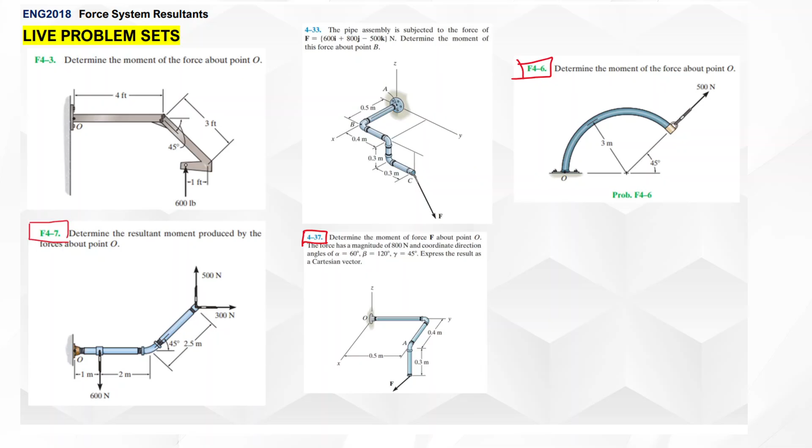We're not going to go for Cartesian vector notation anymore that much. So here we have some more 3D problems - we're going to go more on beams, the reactions, and...

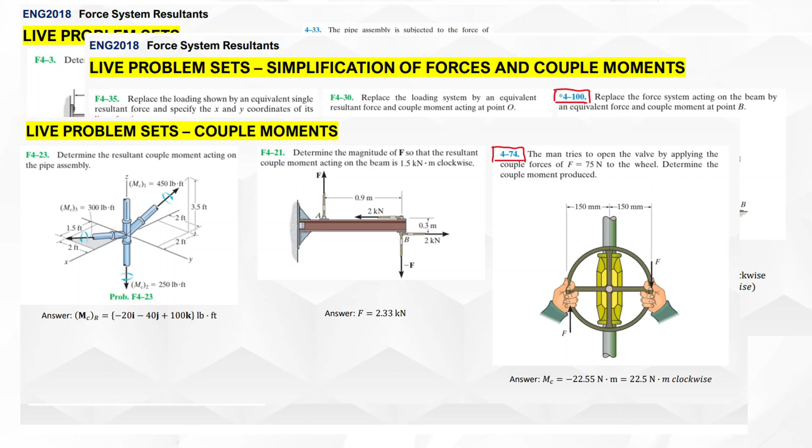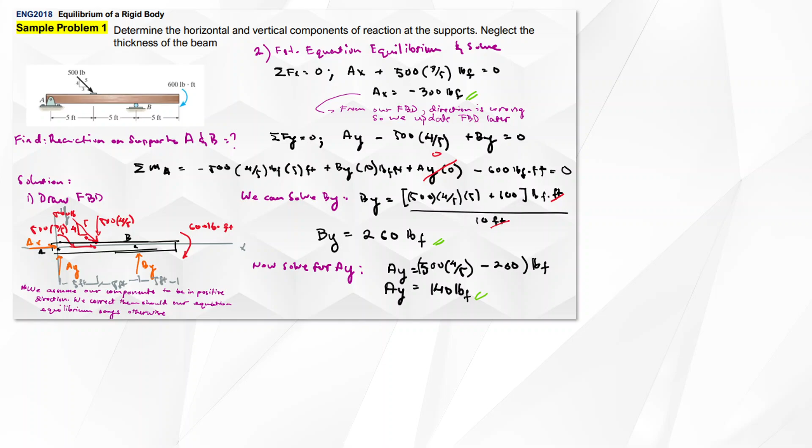...couple moments. And establishing those reactions, understanding there's an algorithm here, a step-by-step process: you draw your FBD, establish your equilibrium equations, then solve. Then making sure you know how to orient yourself, whether 2D or 3D. So here's a classic example.

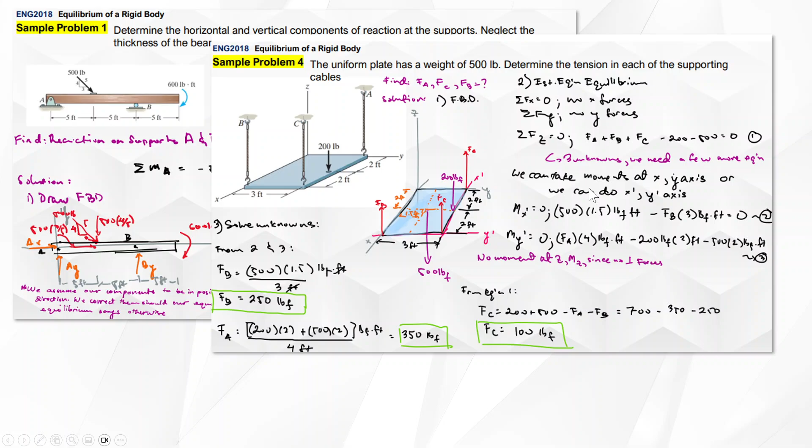And of course, it's a kind of trusses. We can solve these members by sections, and we also have to assume whether it's really in tension or compression, because in actual loads we have compressive and tensile stress - the pull and the push action as well. If we assume a particular direction and the answer turns out negative, it means our assumed direction is wrong.

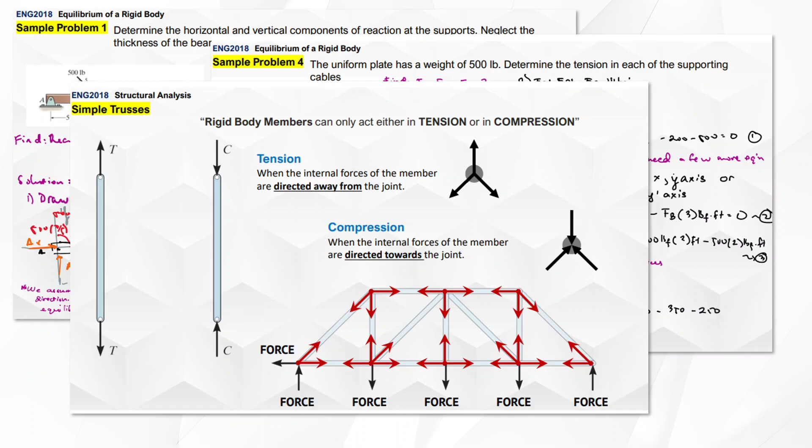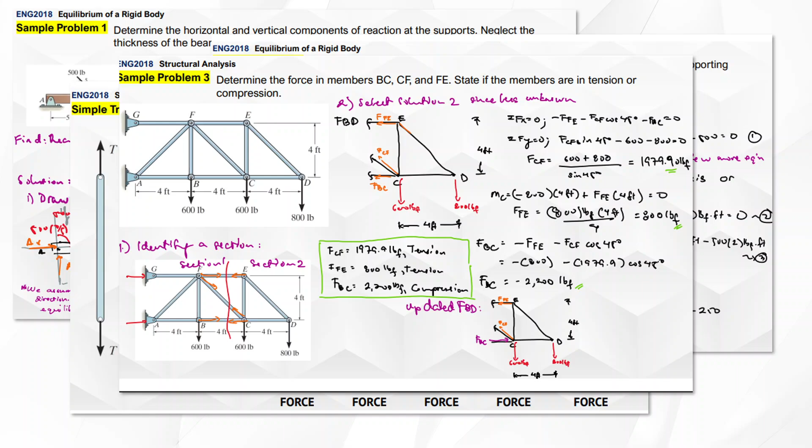So just like in trusses, we can solve this by sections too. We have to choose a segment where it matters, and sometimes we need the entire segment to solve for unknown forces before we actually solve the segment that matters - you'll get that along the way. Then, of course, summation of forces equals zero, as well as for moment.

Just a brief recap, we have these reactions. For mechanics of deformable bodies, we now care about the internal forces happening in it, in direct relation to the external force applied to the body. And per connection, there is an equivalent reaction - you can read through that.

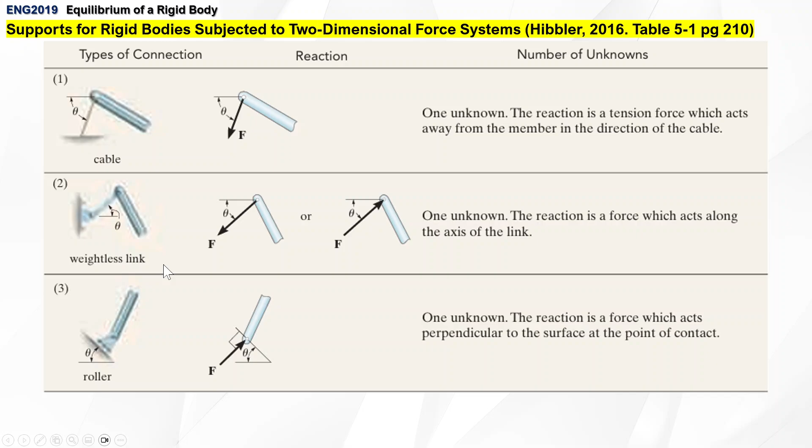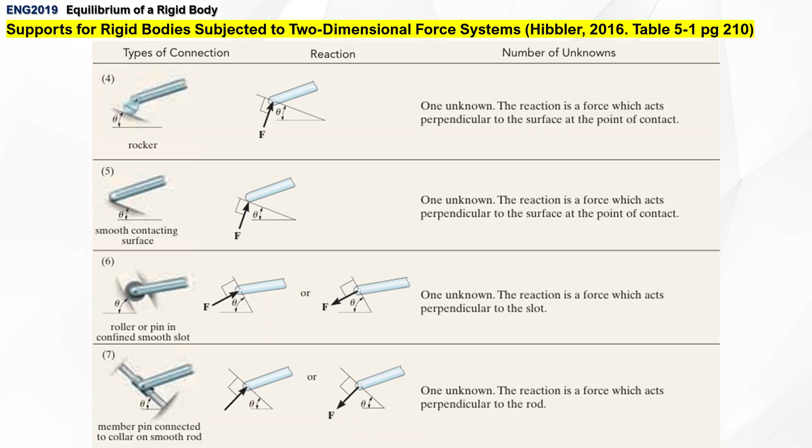These are just lessons from back then in our statics days. But primarily we'll be dealing with a lot more rocker, smooth contacting surface, cables, roller and pin, smooth pin and hinge - especially that, for our shear stress. So we need to determine that, and of course fixed supports. There's also some 3D here.

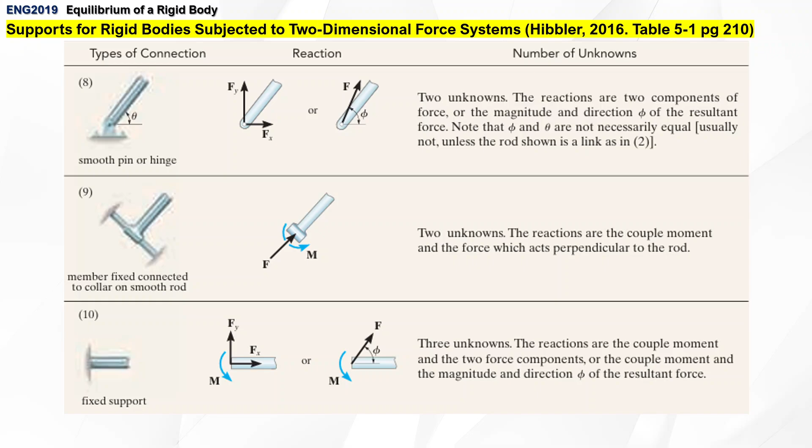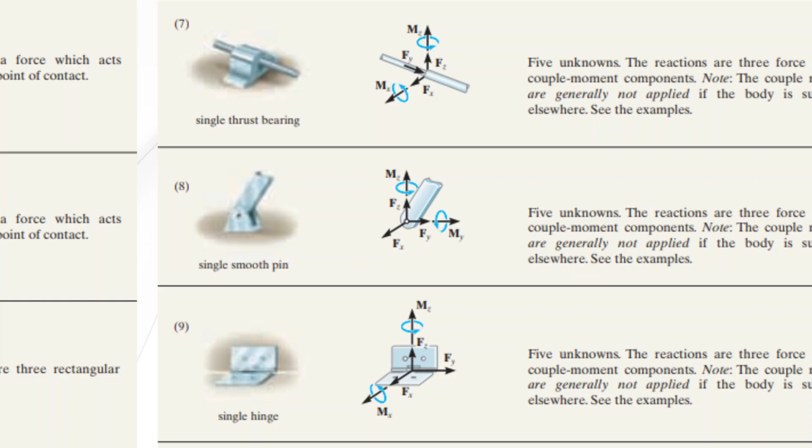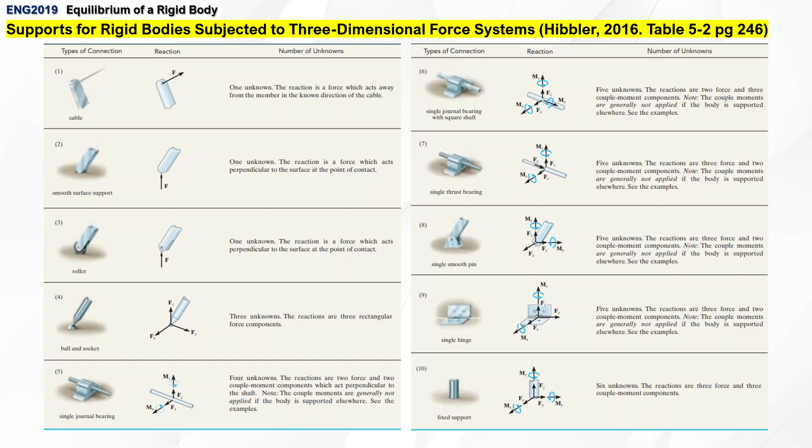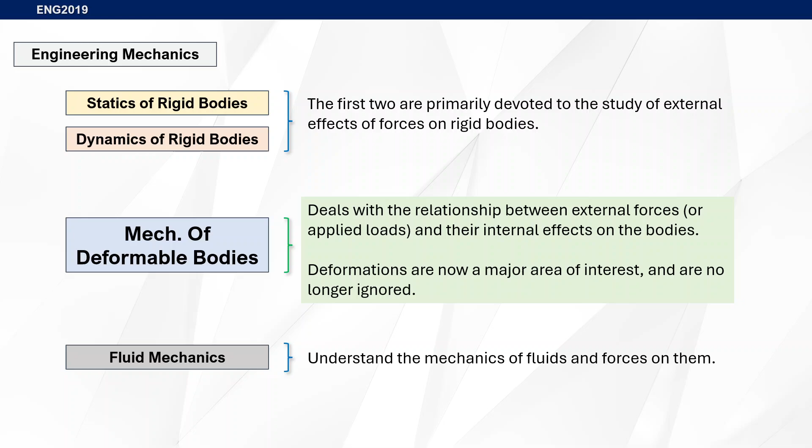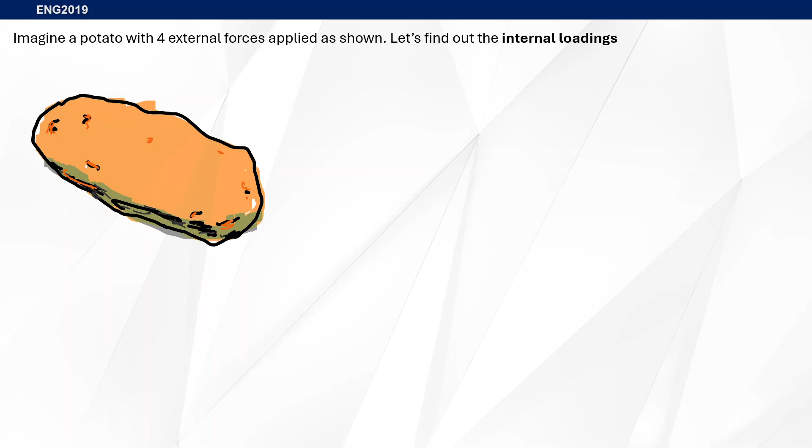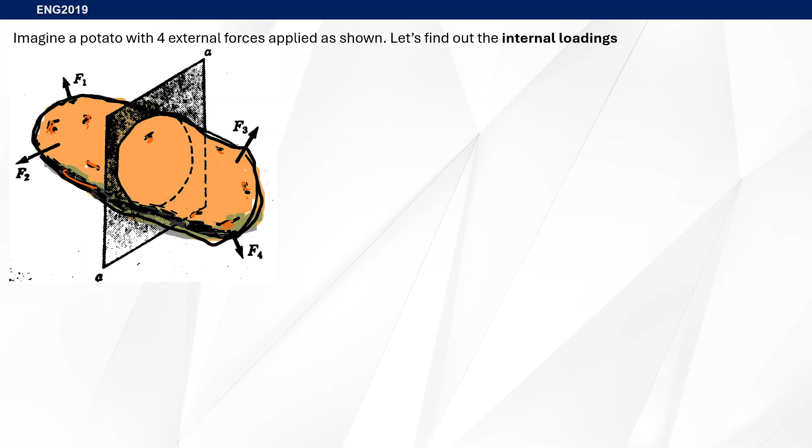So to understand the kinds of loads we're dealing with here, the internal forces - technically that's a continuation of statics, but I thought it's going to be discussed again here in mechanics of deformable bodies. So this is my chance again to continue the story. We're talking about internal forces here, or what we call internal loads. Imagine you have a potato, and the potato has four external forces applied as shown. I just traced the diagram, and I don't think Hibbler has a better drawing, but I like this representation - it's simpler and straightforward. So I'm going to use what your two professors already did. We're here to identify the internal loadings, so we're going to chop that up and see the inner workings of the forces inside this potato. So I'm going to show them all - we have axial, we have torsional, we have shear, and we have bending moment.

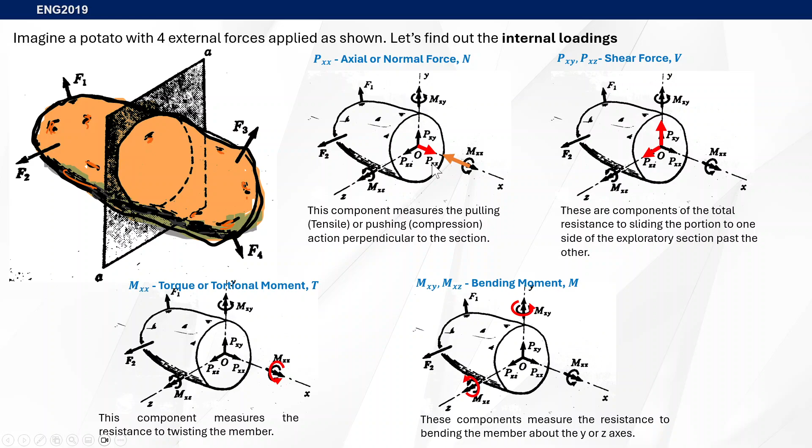For axial here, from the word axial, it's primarily about pulling and or pushing. You notice here there's two forces again - pulling we have tensile, and pushing we have compression, and it's generally applied perpendicular to the cross section of this particular potato, and normally done along the axis. In this particular case, the x, y, z are flipped, so it's a bit weird, but the same logic applies.

And with shear forces, this is done in parallel. So we have longitudinal and tangential forces, but I guess that's more on the torsional side. These are components of the total resistance to sliding. Meaning this cross section, this area, the force is being applied in parallel to it - whether at the y-axis or z-axis here.

And then for torque or torsional moment, this is moment - this is the resistance to twisting members. And then finally there's bending moment - it measures the resistance to bending about the y or z axis, at least relative to this figure here. This is when we're talking about 3D.

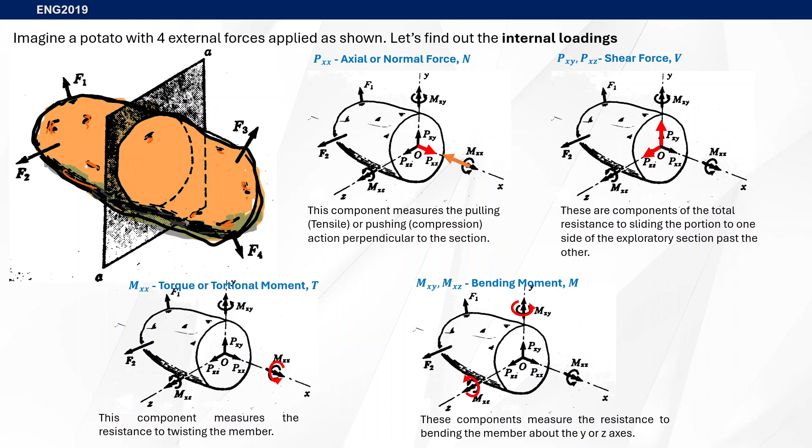So when we're talking about objects in 3D, we normally deal with the axial or normal force, which could be compression or tensile. We have shear forces, we have torsional moment or torque, and of course we have bending moment for 3D. But if our potato is only subjected to a coplanar system of forces, or simply 2D, we can consider only dealing with normal force, shear force, and bending moment. This one is directly from your book, Hibbeler 2011, page 9.

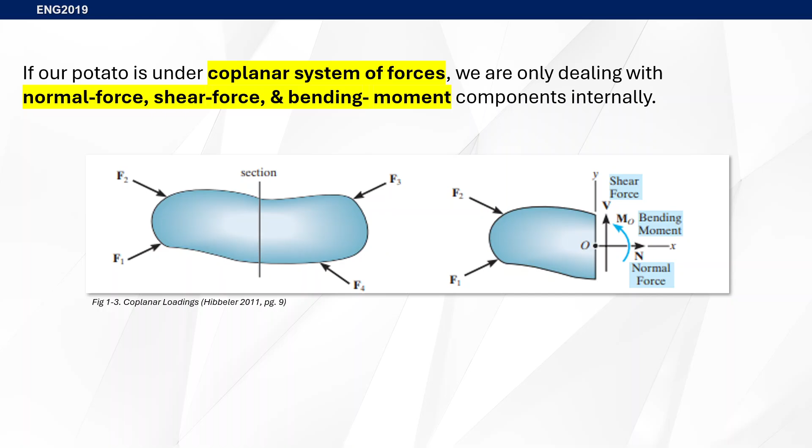Earlier, I've shown some types of connections and their particular reactions. So again, these are the common types of connections that we'll primarily be using, whether it's 2D or 3D. We have a cable, a roller, a smooth support, external pin, internal pin, and finally fixed support.

Just like I said, to determine the reaction force, you just have to know what kind of force this type of connection is trying to prevent. For example, here it's trying to fall down, so the reaction must be here. This one is trying to prevent going down further, this roller, so we have to put it up. That's the reaction. Smooth surface, so we know with a smooth surface it has to be a particular perpendicular reaction force.

External pin is preventing vertical and horizontal movement, so that's got to be x and y. Internal pin is also preventing x and y movement. With fixed support, it's not only preventing horizontal and vertical movement, it's also preventing any particular bending or moment. That is for coplanar systems.

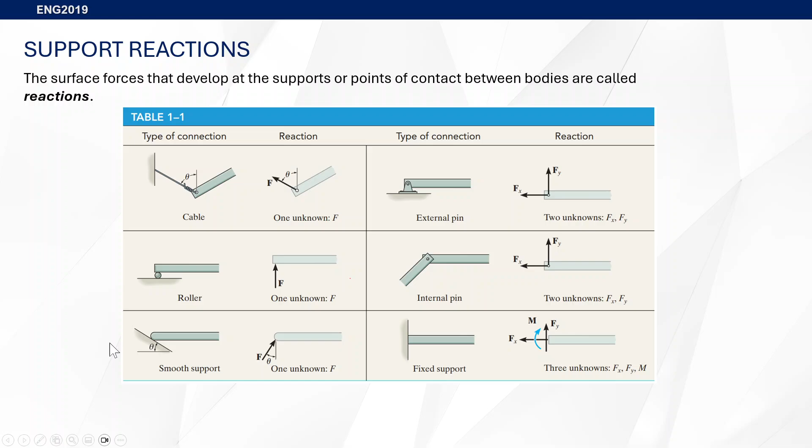Once you determine your reaction forces, or basically once you've completed your free body diagram, it's time for you to establish your equations of equilibrium. Equilibrium of a body requires both a balance of forces. We're still talking about rigid bodies. It has to be stationary. It has to be rigid.

It just so happens we're interested in knowing what's happening inside by a certain degree, by how much force this is taking inside. So we know there's an external load. We know it's going to be rigid, but by how much? But when it comes to failure, that's a totally different topic.

We'll be talking about strain. Here, the summation of forces and moment should be equal to zero, whether we're dealing with 2D or planar systems, or 3D, so x, y, z here.

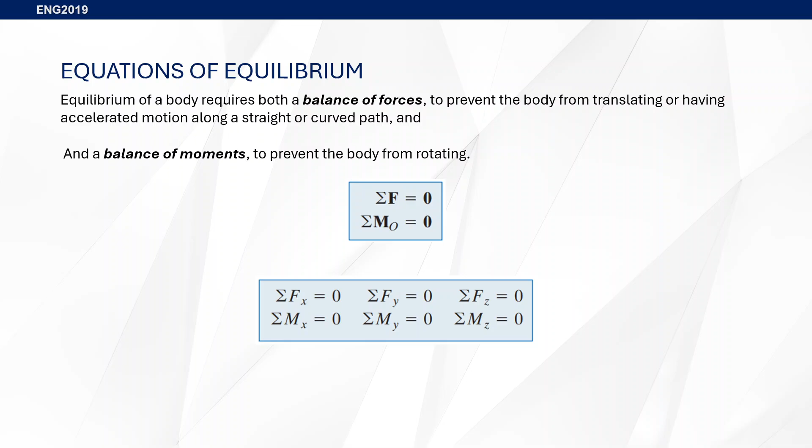I'll just put here some general procedures. Feel free to read it on your own time. It came straight from your book, so you can read it there. But you'll be able to understand these processes further if you just solve some sample problems.

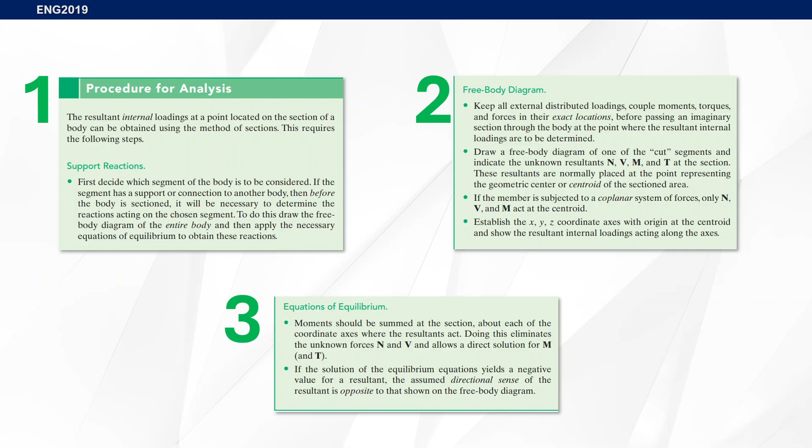Okay, so here's one. The animations here are going to be wacky, so just bear with me here. We're here to determine the internal loadings acting on the cross section at C on the cantilevered beam shown below. What we have here is a cantilevered beam.

We have a non-uniform distributed load, in the shape of a triangle. We're only interested in the cross section C, and we can solve it either by segment AC or segment CB. So we need to pick a side. In this particular case, I chose CB so that I don't have to involve this guy, I don't have to take the moment or anything like that.

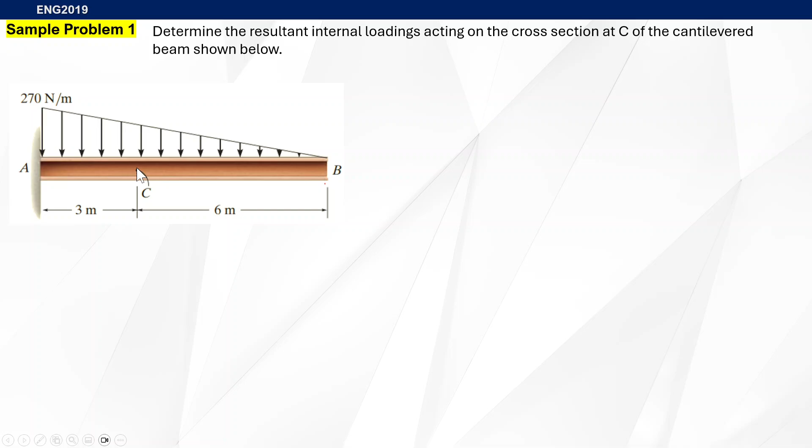So, okay. And then from there, I need to know what is the weight per meter distribution at point C. So there we go. In this particular case, it's a lot simpler since we can use ratios of similar triangles to determine the weight per length force here, the W basically. So once I did that, 270 over 9 equals to W over 6.

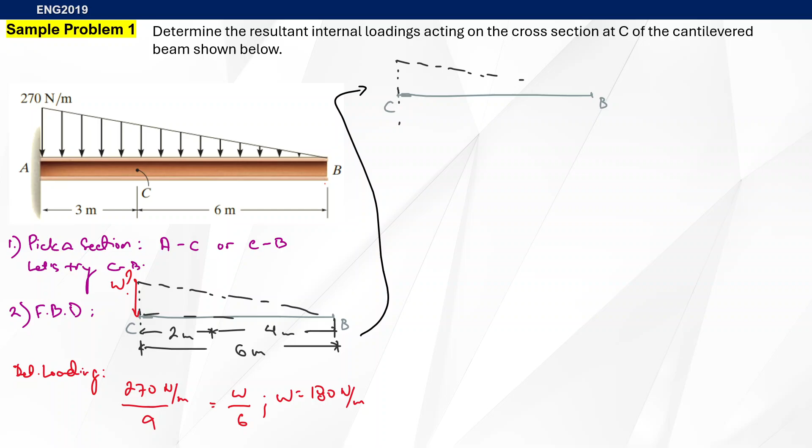Similar triangle. And then our W will be 180 newtons per meter. And from that, we can rewrite now our FBD. The next step here, if you recall our statics lesson, lecture 5 and 6, after we determine that, we need to determine now our concentrated force. So we need to convert this particular uneven distributed force into one concentrated force.

And we need to determine where it's going to be applied. Since this is a triangle, we can determine by geometry that the concentrated load is somewhere 2/3 or 1/3 from this particular point. 1/3 from here will be 2 meters, and the rest here is 4 meters. Hence, we got these dimensions here. So if you have questions, it's just a matter of geometry and proportion.

Now, with the concentrated load, we just have to determine the load under this particular curve, or in this case, under this line. So it's just the area of the triangle basically, base times height divided by 2. So we got base 6 times height 180, divided by 2, that will be 540 newtons. So that's the concentrated load at 2 meters from point C.

Then after that, we need to showcase the reaction forces here. This is a cantilevered beam. It's preventing the Y movement or shear, and also preventing horizontal movement, which in this case is the normal force, and it's also preventing bending moment here. We're dealing with a problem that's planar, so we don't have any torsional moment or torque for that matter. So this is our assumed direction here.

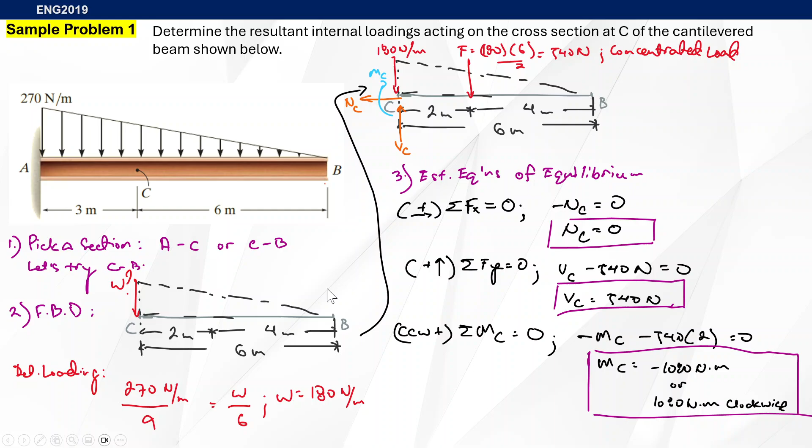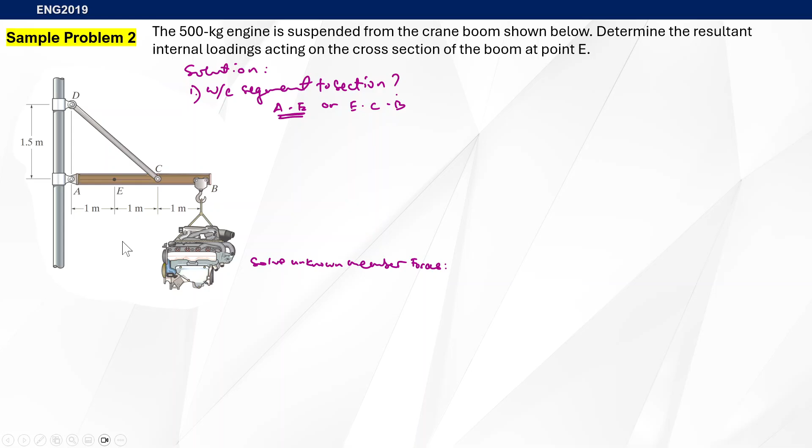So this is a two-force member, just like in trusses. So we build the FBD first, and our FBD would look something like this. I got this by 1.5 divided by 2 meters, 1 plus 2. I got the ratio of 3 over 4, so I put that here, and then got 5 by trigonometry, by Pythagorean theorem.

And we have AX here and AY, and that's pretty much it. So here we have 1, 2, 3, 4 unknowns. What we do here is clamp this up first by getting the moment about point A so that we have only two unknowns, one unknown left.

So from there, by getting the moment at point A, we will get FCD at 12,258.25 newtons. And after that, we can now get the other forces such as AX and AY by getting the summation of forces in X and Y, with AX at 9,806.6 newtons, and finally AY at 2,451.65 newtons. So it seems to me that my assumption of the directions of the FBD is correct.

All right, next up here, yeah, I told you the order of the animations are messed up, you know. So we're not yet done here because we need to determine the internal loadings. So now that we know all forces, we can now focus on segment AE.